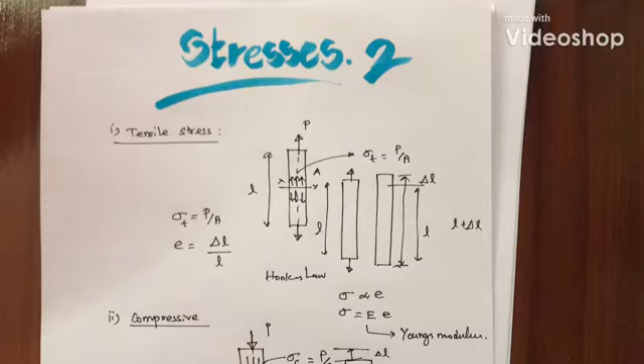Hi, we can go to stresses part 2.

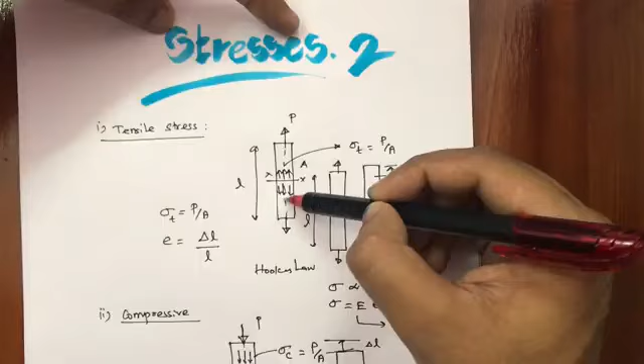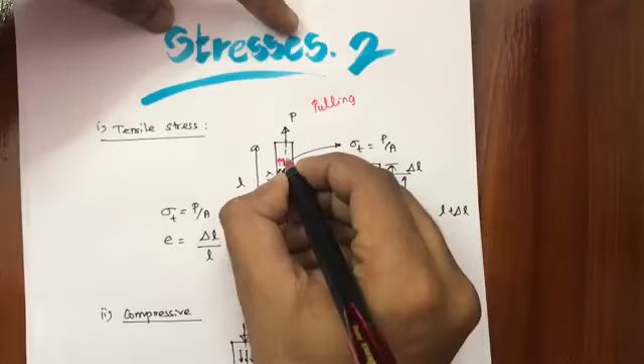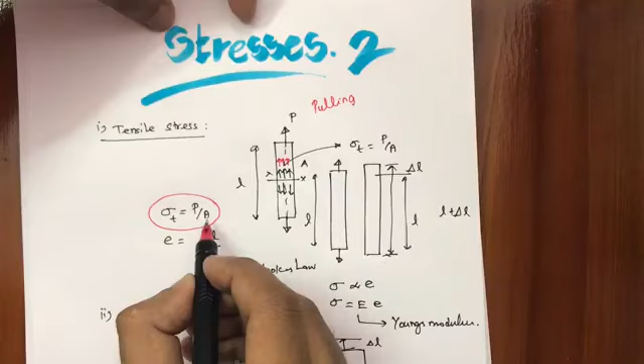When the load is applied on an element along the axis, it is kind of pulling, which is nothing but a tensile load. So due to tensile load, some stress will be generated inside the element. The stress is known as tensile stress. So it is nothing but applied tensile load by the cross-sectional area, whatever may be the cross-section, like a rectangular, circular or square cross-section. So based on the cross-section, the stress will be generated on it.

And then when we apply the load which exceeds the yield value, yield na romba simple.

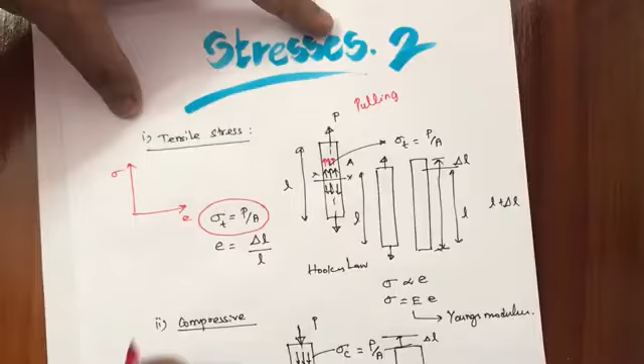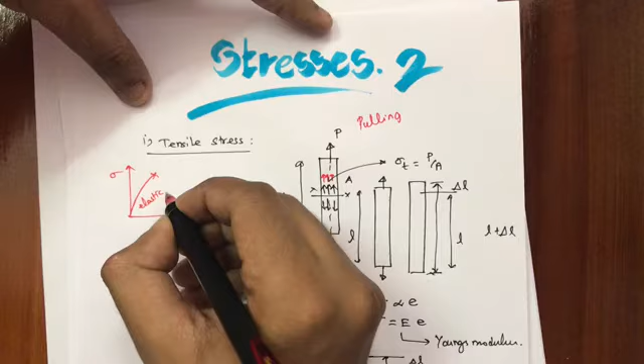Some deviation will be there, then the material comes under plastic region.

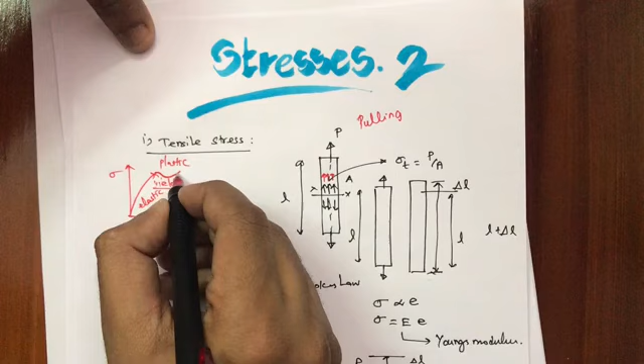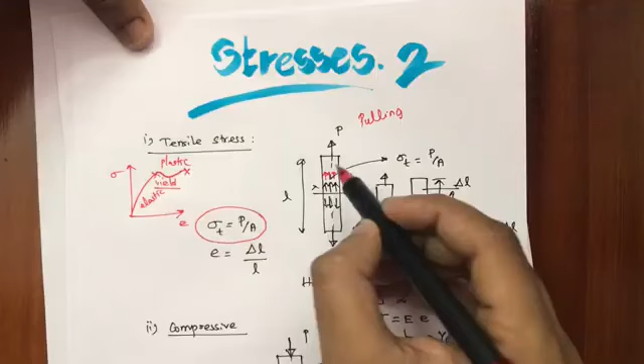So when we apply the load, when the load increases till the yield point, the material or the element will come to original position. So when it reaches the yield point, it will go under the plastic region, then it will never come to its original position. So plastic na complete permanent deformation irukkum.

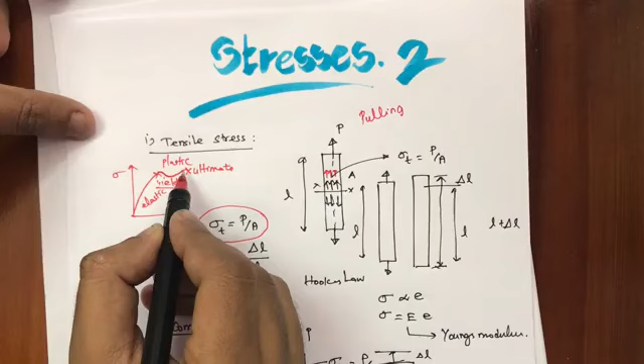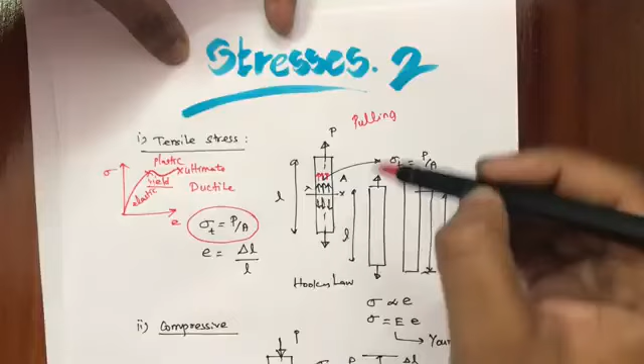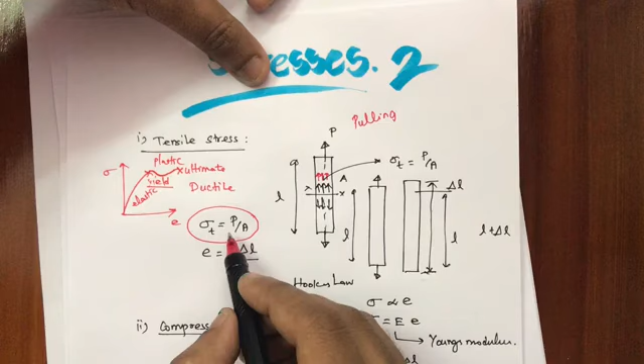So here, when I apply the load along the axis, which is kind of pulling, the stresses will be generated inside it, that is tensile stress, and that is nothing but load by area. So due to the elongation, some strain will be there. So strain enna, elongated length by original length, change in length by original length. Hooke's law padi stressum strainum directly proportional irukkum.

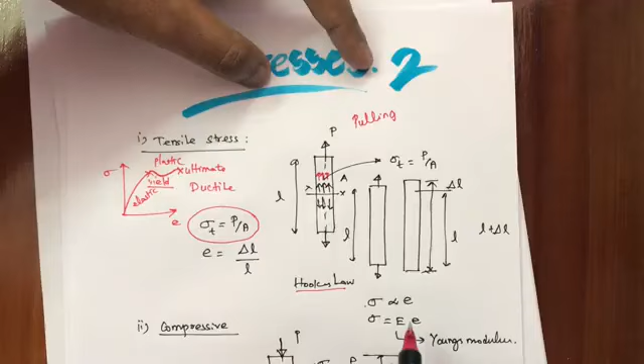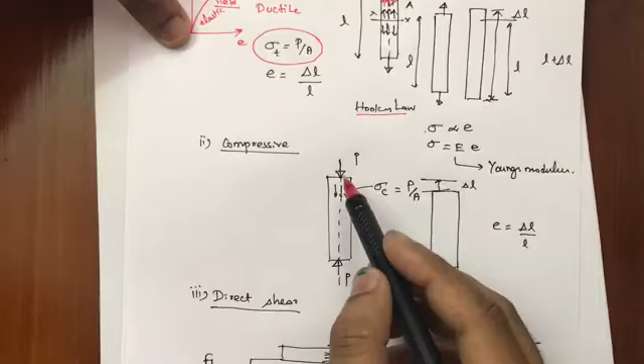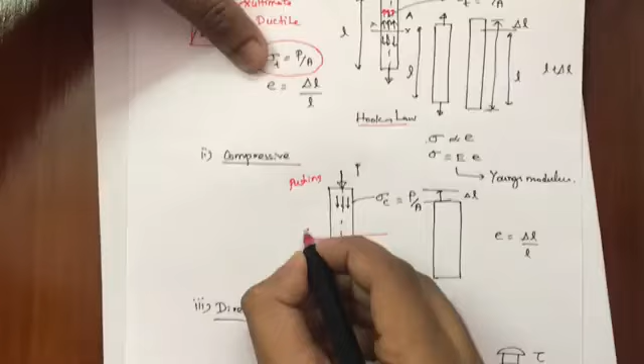So now come to compressive stress. This is similar to the tensile one but opposite in direction. On the same element we have to apply the load along the axis, but it is kind of pushing. So in the previous case we pull it and here we push it. So due to pushing, the material will be compressed, so internally some stresses will be generated. So the compressive stress is load by area. So here also similarly some compression will be there. So the strain will be change in length by original length.

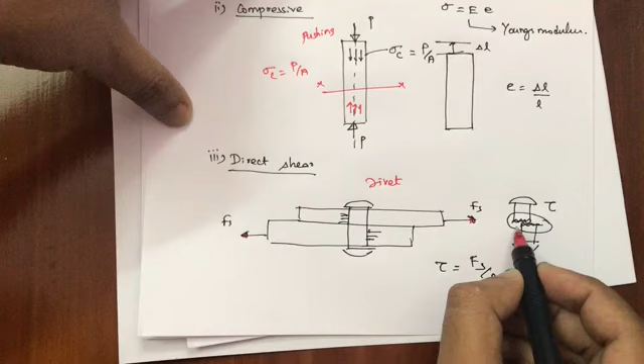And then come to direct shear. We can take the example of a rivet. So when two plates are connected by a rivet and load is applied like this, the middle portion of the rivet will undergo some sliding of material. So when the load exceeds, there is a chance of sliding of material at the middle of the rivet. Due to sliding of material, atoms and molecules, there will be shear stress, which is nothing but direct shear force divided by the area. Area is the cross-section area of the rivet.

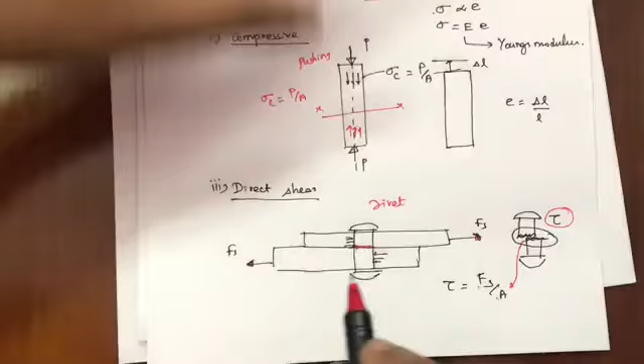So direct shear na, when we apply the load directly, due to the applied load some sliding of material will be there in the element. So due to the sliding of material, shearing stress will be there. So these are the basic direct stresses.

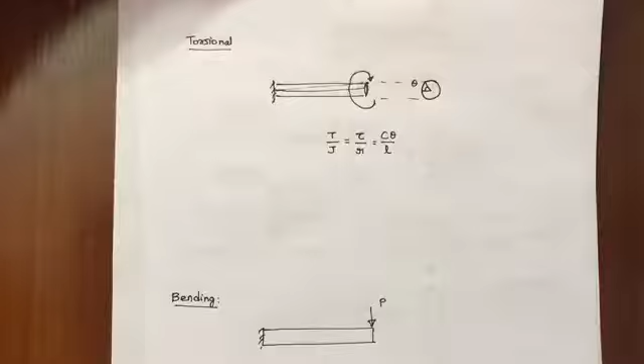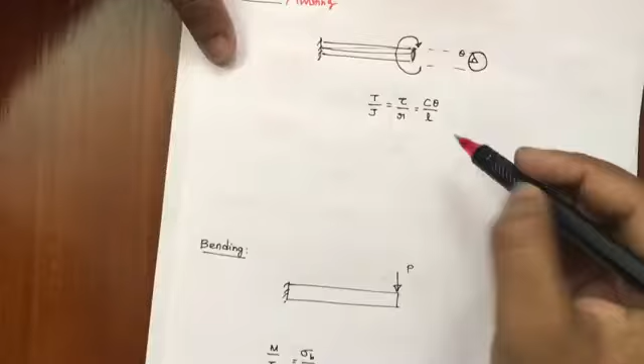And now apart from the direct stresses, which are tensile, compressive and direct shear, there are two additional important stresses. One is torsional or twisting and another one is bending. We have seen the torsional equation and bending equation in the strength of materials subject. So we can see them simply, and if you need, you can mention in the comment and we can see in detail.

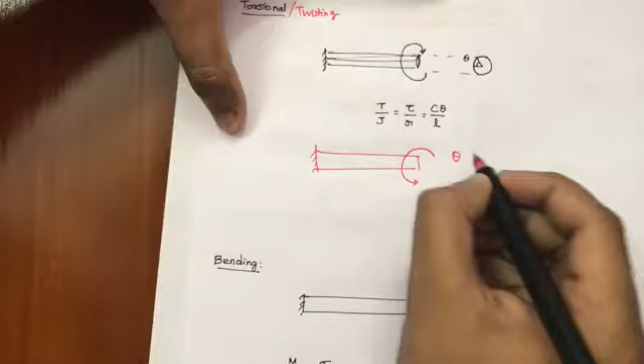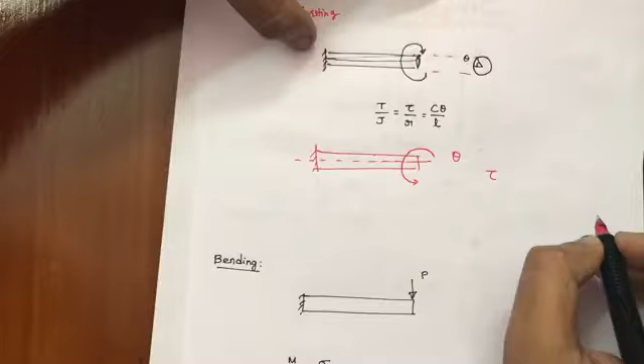So torsion na, consider a rod element. We twist the rod element by a particular theta angle about its own axis. So when we twist, there is some material sliding inside the element, so due to that shear stress will be generated. We can calculate the shear stress by using the torsional equation: T by J is equal to tau by R.

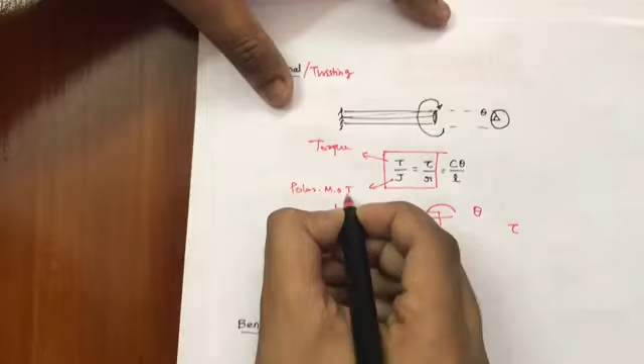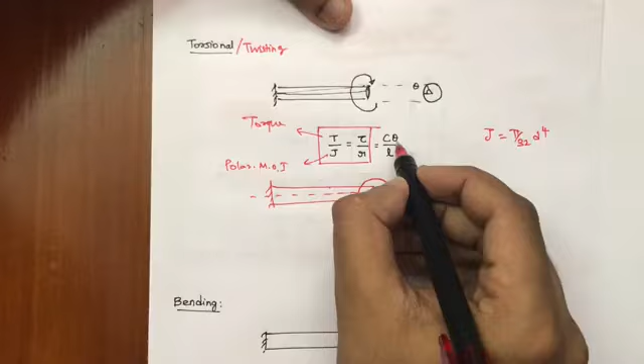T is your torque and J is the polar moment of inertia. For a circular cross section, J is equal to pi by 32 d power 4. And then C is the modulus of rigidity, theta is the angle of twist, and L is the length of the rod. So based on the torsional equation, we can calculate the torsional stresses.

And next, we can come to bending. When you apply the load perpendicular to the axis, the stress generated will be the bending stress. Here also the bending equation will be there. We can calculate the bending stress as M y divided by I. M is your bending moment, which is the applied load into the perpendicular distance, that is the moment.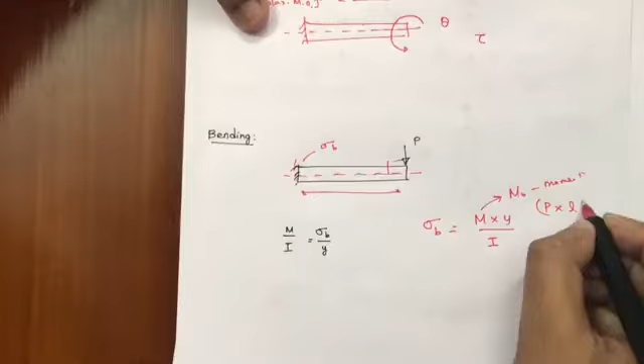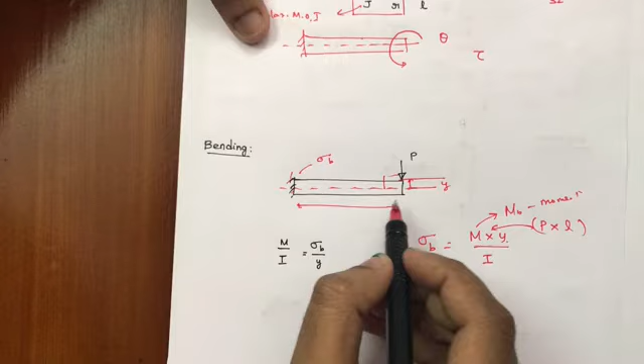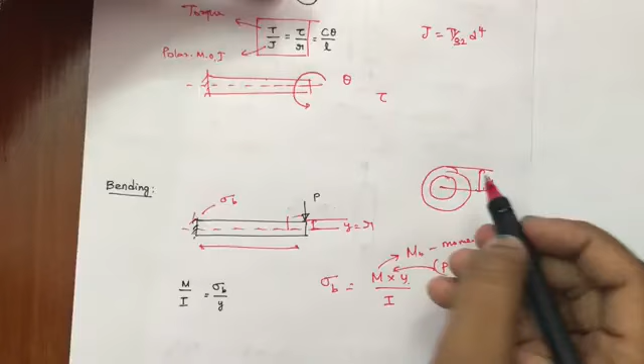And then y is the distance between the outermost layer and the axis. For this particular example, y is the radius of the rod. Suppose it is a hollow shaft in cross section, y will be the distance from the axis to the outermost layer, not the inner layer or inner radius. So by using the bending moment equation, we can calculate the bending stress.

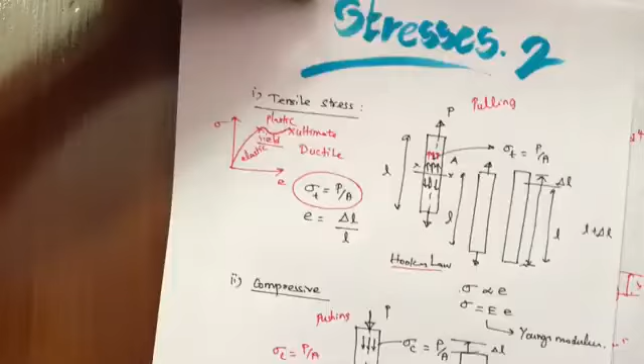So these are the 5 major stresses: tensile, compressive, direct shear, torsional and bending. So based on that, by using the stress formulas and the application of loads, we can design the element. We can see that in the next video.